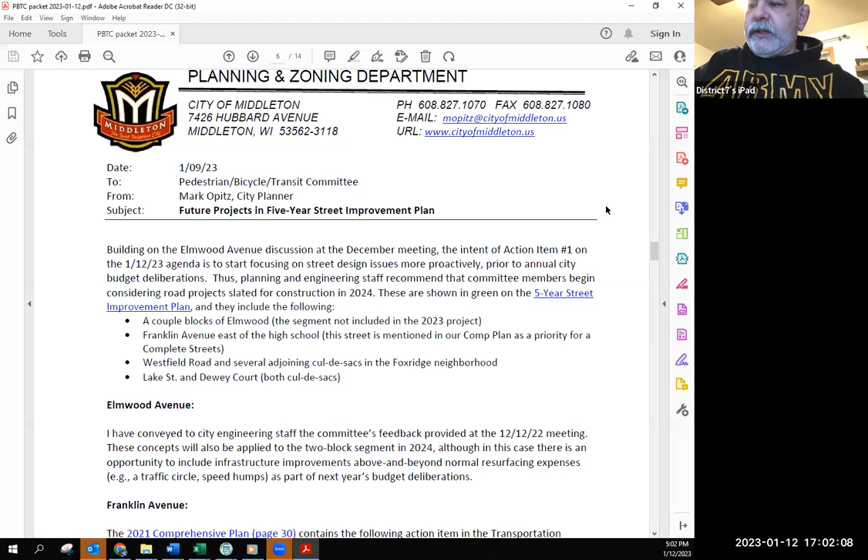Okay, our first agenda item is the 5-year street improvement plan projects anticipated for 2024. So what I'd like to do, Mark, is bring everybody up to speed. I want to make sure everybody's familiar with the fact that every year the city has a 5-year street improvement plan. Mark, would you put that on the screen for me, please?

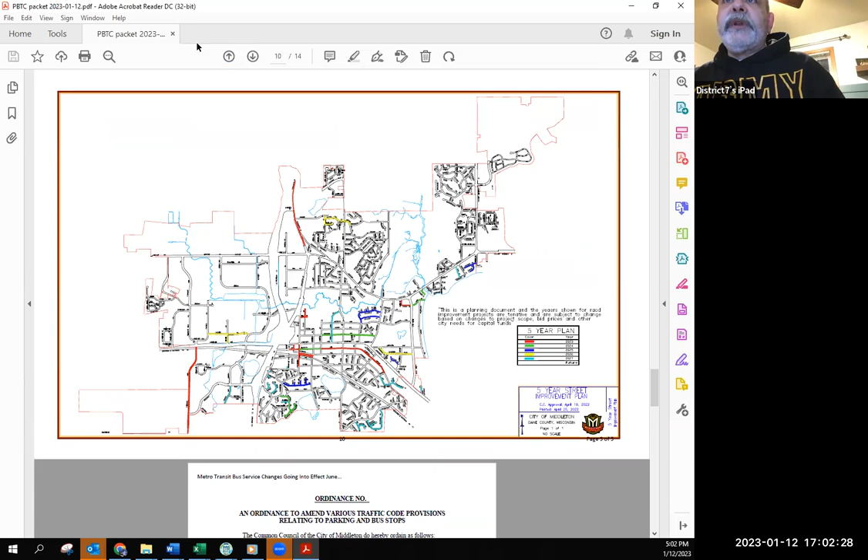While we do a 5-year plan and it goes through Public Works and then eventually makes it to Plan Commission, it makes its way to the council, it is a plan. So it's subject to change, and on occasion it does get switched around and changed or updated, but it's basically the plan going forward.

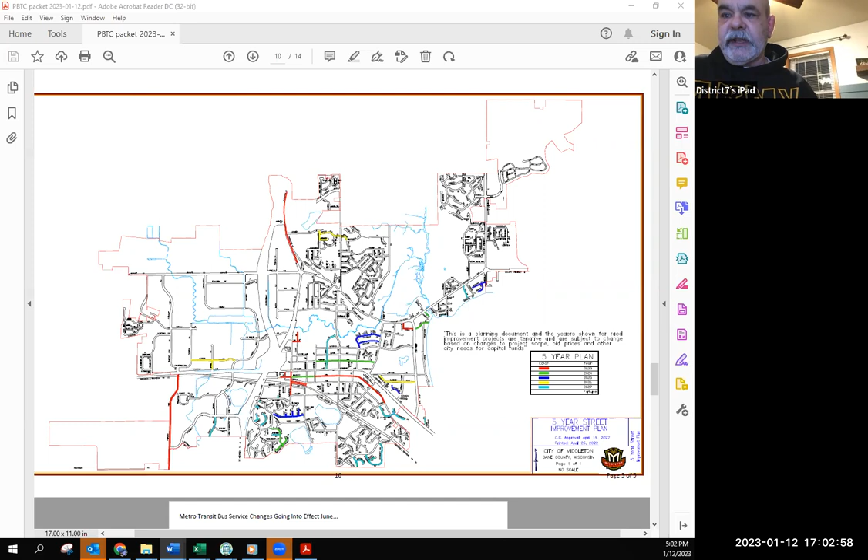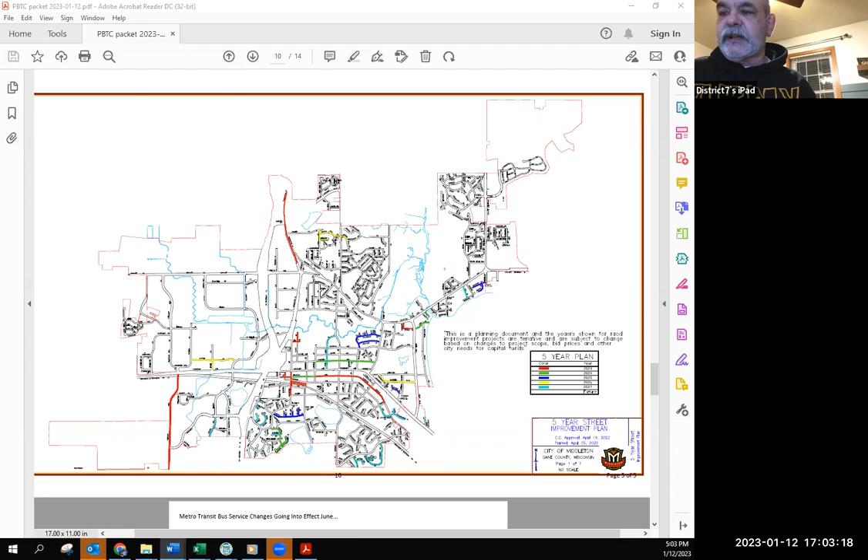As we talked about in our last meeting, this is the opportunity for the Bike and Ped Committee to take a look at the upcoming projects and have some input before it goes on to Public Works, which then recommends it to the Plan Commission and council. So to keep us on track, I just want to concentrate on the projects in Mark's memo, which are the projects for 2024, and we'll leave any other subject matter for another time.

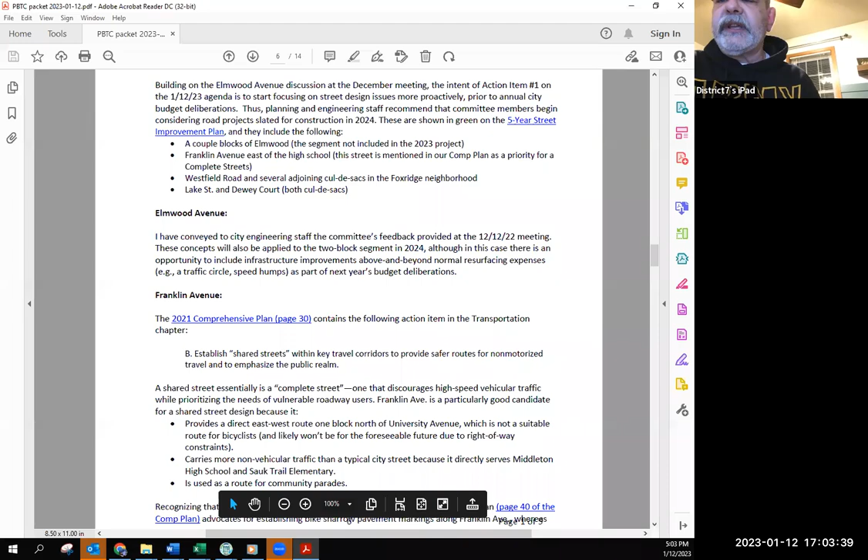Okay. So Mark, would you just give us an overview? I think the best way would be to go with each project one by one, and we can discuss it and see what we have for 2024, and see what suggestions or recommendations we'd like to pass on to the Public Works Committee.

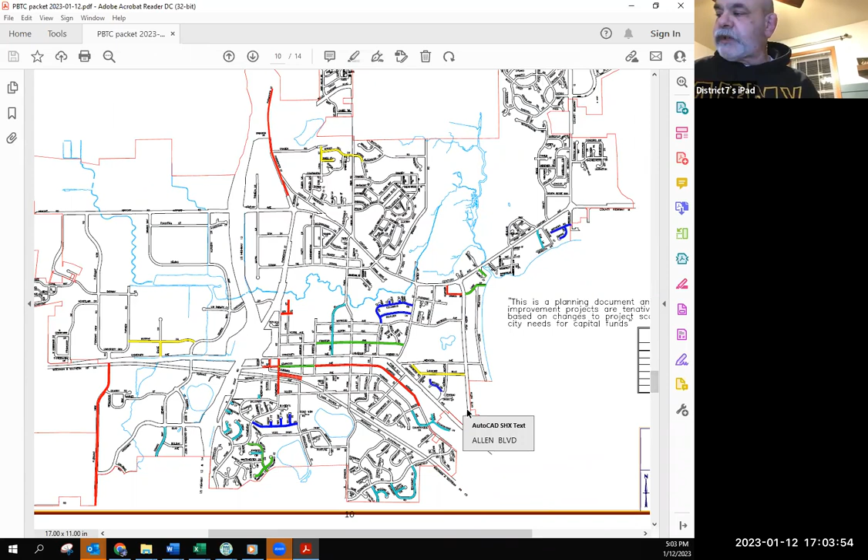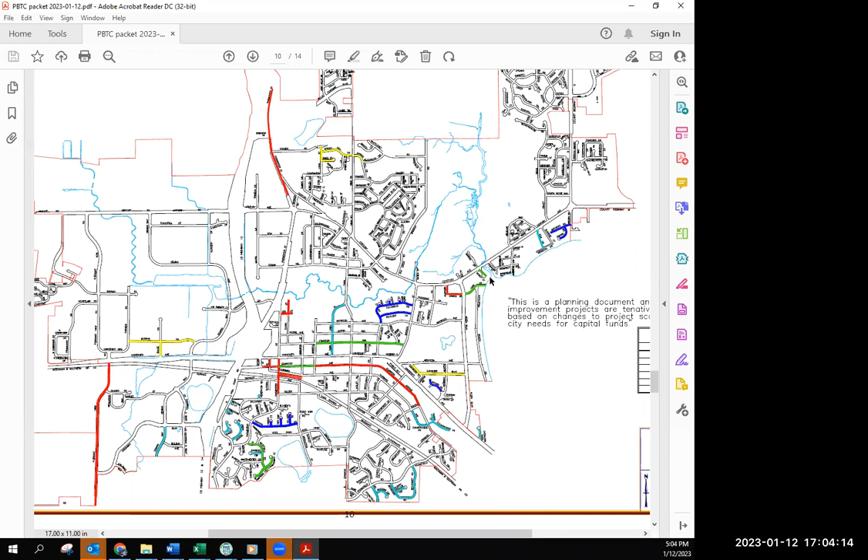Sure. So on the map here, the streets in green are Elmwood, Westfield, and Foxridge, along with a few adjoining cul-de-sacs. Franklin is located just north of University Avenue, and over by Harbor Athletic we have a couple cul-de-sacs as well. Those are the streets mentioned in the memo, and I'll take them in order.

So Elmwood, we talked about at the meeting in December, and that will be the last two blocks being planned for work in 2024. So I didn't think there was really anything to talk about there.

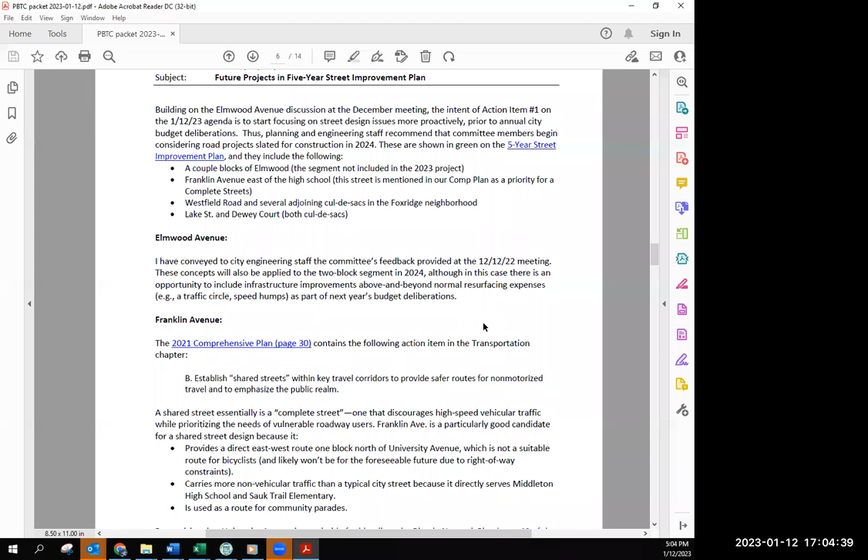I will briefly mention that there's been some discussion since that meeting about, given the fact that there are no bike lanes being recommended, possibly revisiting the east-west bike route through the city north of University Avenue, possibly shifting that to Hubbard. But we'll have that as a future agenda item.

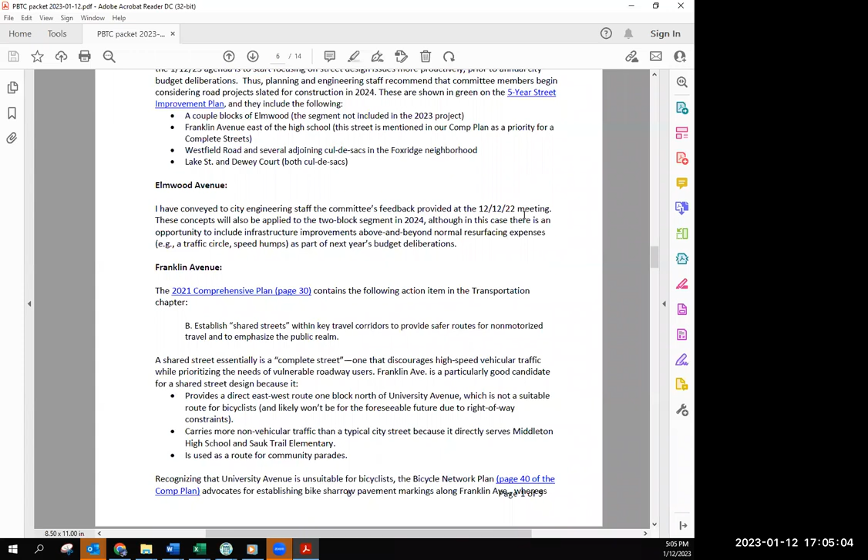Franklin Avenue got special mention in our comprehensive plan, so I wrote a little more about that in the memo. The comp plan referred to this as a possible candidate for a shared street, essentially a complete street, recognizing that we don't have a good east-west street north of University Avenue designated for heavier bicycle use and pedestrian traffic.

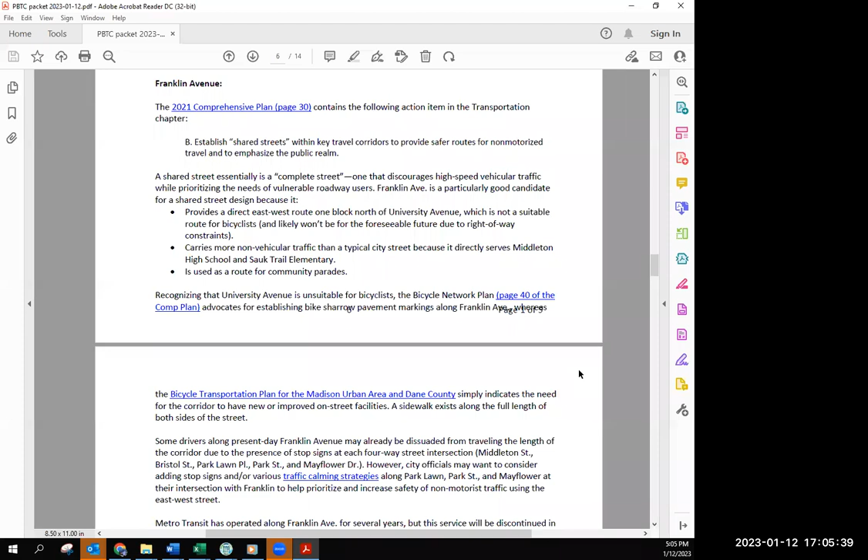Obviously all of our streets are to be complete streets moving forward, and that's why the comp plan identified this as a possible opportunity—as we look at redesign, reconstruction, or resurfacing—to install some amenities for pedestrian and bicycle safety. So that's the focus of the rest of this section.

I did note that we haven't really had a significant problem with crashes, especially involving pedestrians and bicyclists. Well, obviously one is too many—we don't ever want to see anyone get in a crash. Pedestrians and bicyclists usually lose out in those crashes.

We have the high school nearby on one side, Sauk Trail on the other. We now have this as the route of our Good Neighbor Festival Parade.

University Avenue is not suitable for bicycling at this parallel stretch of University, west of Branch Street. The bus service that exists there today is going to be discontinued in June. So those are the factors I mentioned in the memo.

I would recommend, Dan, that the committee discuss the traffic calming strategies, which I gave you a link to in the memo. This website came up on my other screen. Here we go, do you see it?

There are any number of websites I could have pointed to, but this seemed like a really good one because it showed pictures with the names of the traffic calming strategies.

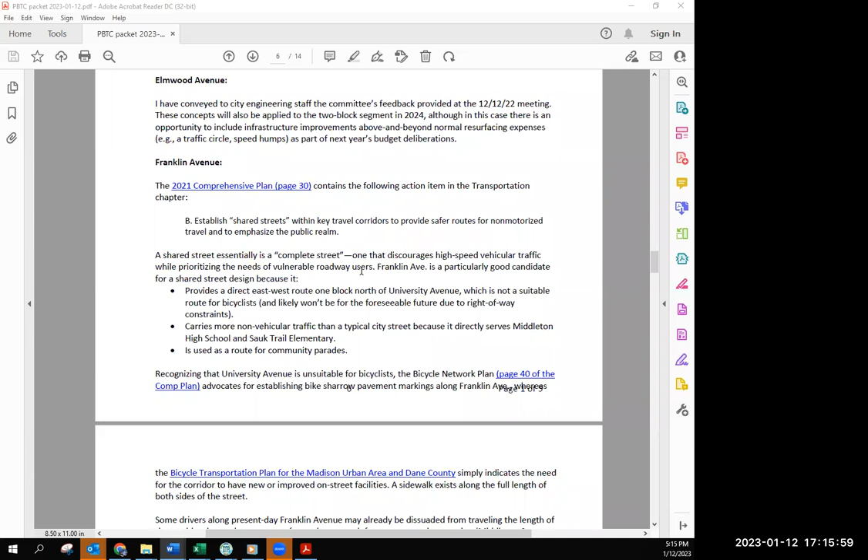And in your memo, you mentioned that Franklin has not been, if I'm not mistaken, a place with numerous complaints or accidents. No, or hardly any. That's correct. We have not, from what I saw in the data, the crash data from the last 10 years, there have been 3 crashes on Franklin reported in the state database. None of them involved pedestrians or bicyclists. And the crashes, I think 2 of them were at intersections.

I should clarify that these were crashes that were possible injury crashes or more. There could have been other crashes, probably property damage only, but the database wouldn't let me query all crashes—it was too large a data set and I didn't have a subscription. So it's possible there were other bumper to bumper, rear end property damage crashes without injuries. I want to clarify that.

The most significant crashes with potential injuries—there were only 3—seemed to be 1 possible injury and 1 minor injury suspected at Park Lawn and Park Street. The other was west of Wood Road. None of those accidents involved a bicyclist or pedestrian. That's correct—I checked all accidents involving pedestrians and bicyclists, and none had that flag in the database.

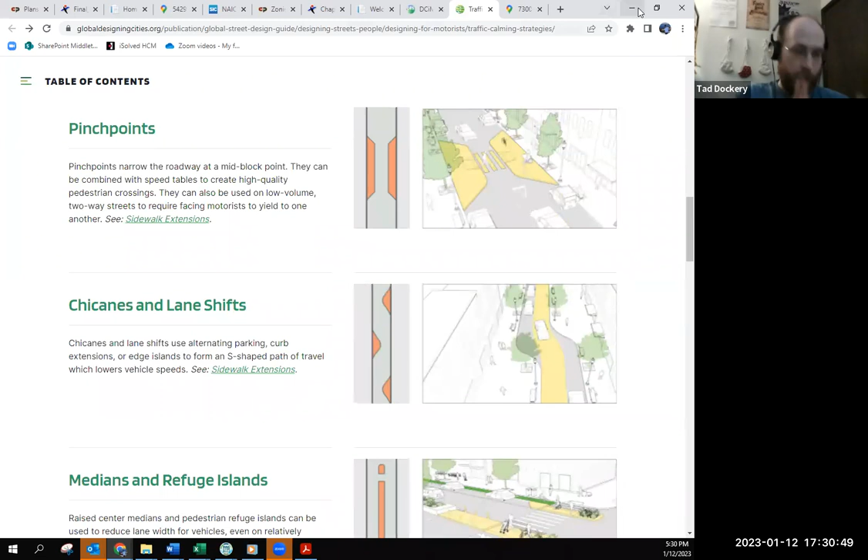Tad? So if we don't want to - I feel like we could narrow the street. I understand the curb and gutter aspect is very expensive, but I feel like we could nonetheless narrow the street if we used vertical elements like poles. We could put them in the street and we don't have to reset the curb and gutter. We can use paint in other places to emphasize the poles.

I don't know how much effort this would involve, but assuming it didn't utterly destroy the road, because that would be a bad thing, we could potentially put in some bioswales at various points without completely eliminating or having to redesign the gutters. I'm sort of just spitballing here.

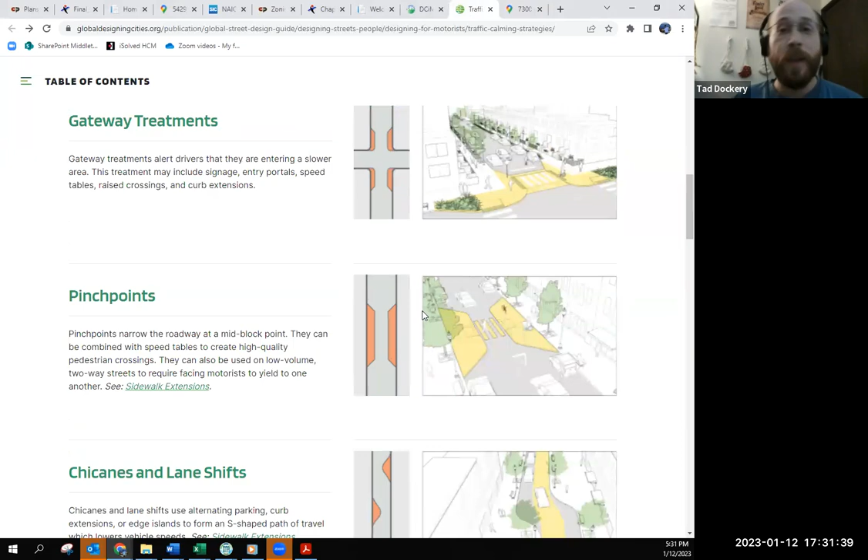Sure. I just suspect there's probably - and I wouldn't be surprised if other cities were doing this. I wouldn't be surprised. Davis, California would be one that I'm sure, if we Google Earth it, Davis would be kind of a mess, but I'm sure there are other cities that have done stuff like this, that have done mill and overlay and haven't narrowed the curbs, but have nonetheless narrowed the streets by various means.

We could do that, and we could do that to help define the on-street parking also. And by doing that to help define the on-street parking, we would put the cyclists in the middle of the road. That has some issues, but for me, I would actually be a bit more comfortable with that than I am with the usual stick 3 feet to the curb and have to swing into traffic mode. I would feel much more visible to motorists. So it's a thought.

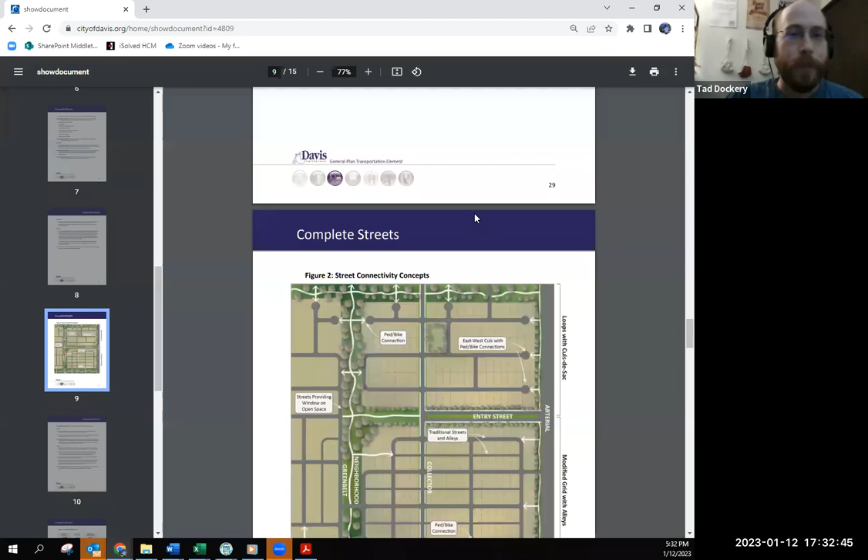I actually am looking at Davis, California here. I just was pulling up a couple things. So while you're talking, I'll just skim through.

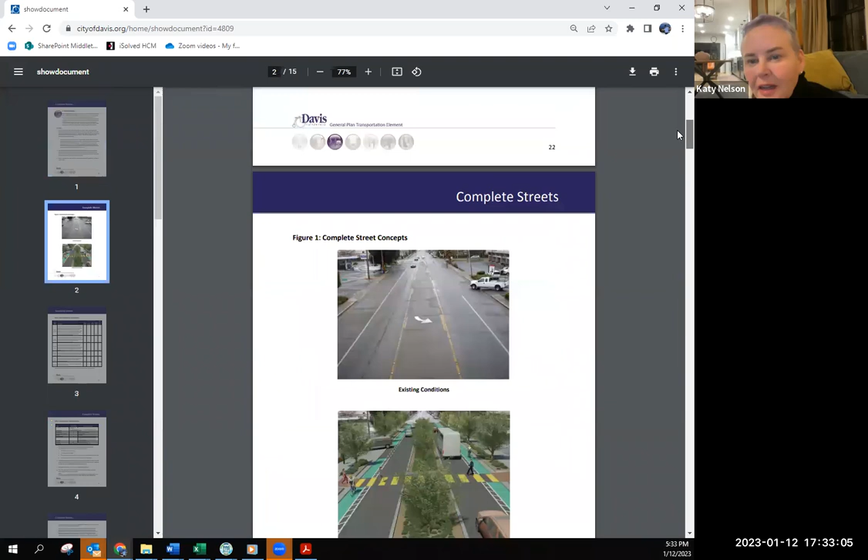Dan, I'm very sorry, I have to go to another meeting right now, CDA. Okay, thanks, Katy, I'm sorry. Is there any no-vote worries that I should come back for or anything? We'll probably be on that by the time you get back. So that's all right, okay. Thank you. Yep.

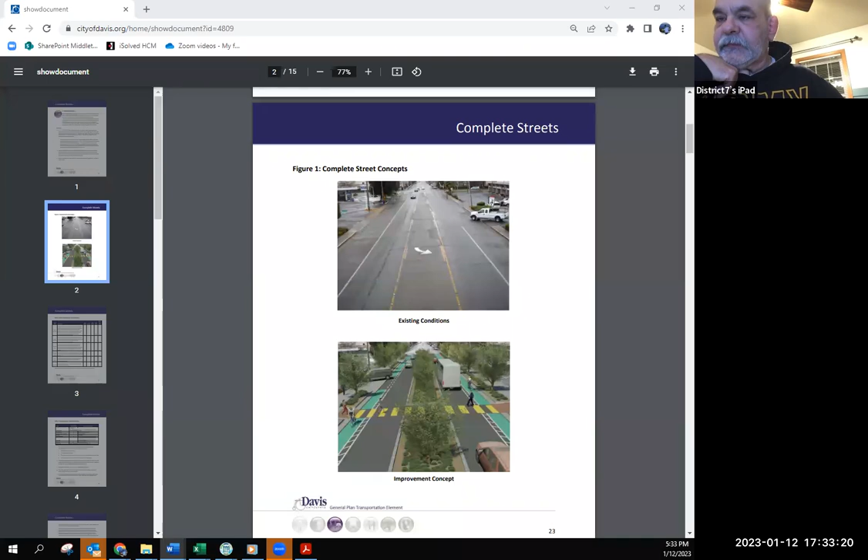One thing I would recommend in the way of signage is a stop sign on Park Street at Franklin would be good for a couple reasons. One, people coming from University Avenue, if they had to wait at the light while on Park Street to cross University, as soon as they get across University, they start to accelerate. There are about 3 houses along Park Street before they reach the corner of Park and Franklin. The other thing, going up Park Street, is they do not encounter any stop signs even when they reach Maywood.

So you have people who, rather than going down University if they want to get over to Allen Boulevard, may come up Park Street, take a right on Maywood, and then go down to Allen Boulevard that way. Visually depicting what Jim is saying, here's the Park-University intersection.

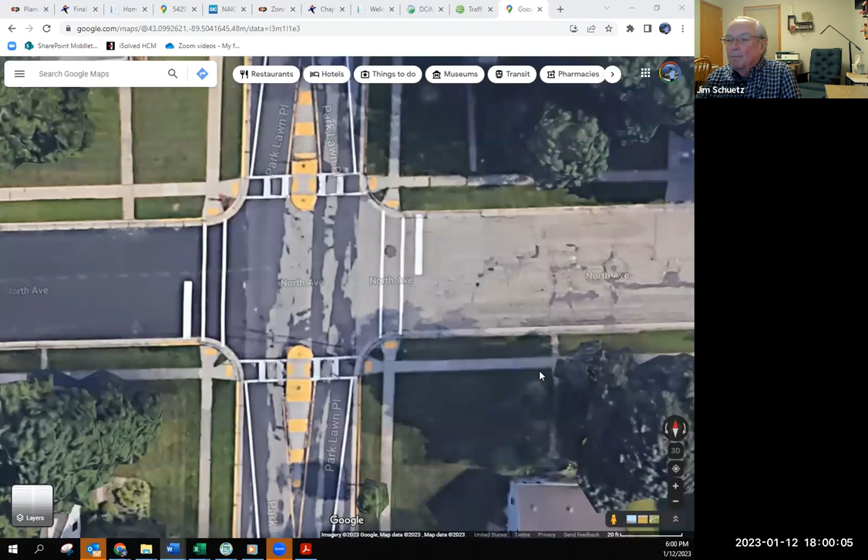Are the ladder pattern crosswalks then at all the intersections along Franklin? I don't think so, it's just that that intersection seems to be so much busier because of Park Street than the other intersections. Actually, we're looking now, well, that was Park and North, Park Lawn and North.

Mark, can I ask you a quick question about that? Does it make sense to go with the ladder pattern all over, since we're trying to make people more aware of pedestrians? Does it pay to be consistent with that? Yeah, all of them from now on?

Yeah, that's why I'm asking for clarification. Go ahead, Dan. I'm sorry, Mark, I was just going to reiterate that's why Mark was asking that. The question is whether or not the committee felt that we just needed that at Park and Franklin, or if we were looking at trying to make that a new standard, in which case we'd want to do it at all the intersections.

And Shawn will say then what governs why they're placed here and not at every intersection in the city. I'm just telling you what he'll say. Well, that's why we have different committees, and why different committees recommend to the council, and then the council decides if there is a conflict.

I mean, isn't that kind of what we're going to try to do, is gradually have all of them be consistent? So, to answer Shawn's question, yes. The answer to why they're not already all over is they will be. It's an immaterial question because it's part of the plan.

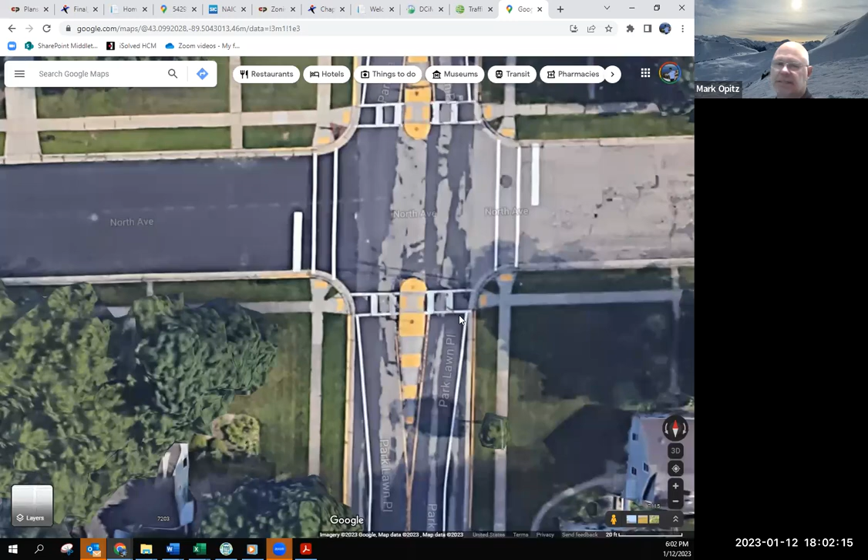Yeah, and I'm just wondering if there's something to be done with the paint, if you can put some kind of additive in it. But I interrupted Carrie, so let's let her finish.

Oh no, it's okay. I was just wondering, is it okay that this is all in one motion, in terms of it going to Public Works? I don't want them to necessarily, like, because they're separate issues, lump them all together and say, nope, we can't do any of it. Or do you think it will be like, here's some options to consider for each thing?

So maybe it doesn't matter if it's in one motion. I don't think that these are our recommendations... I don't think that it'll matter that it's all in one motion, Carrie. You're on Public Works, so you know the spirit of what Bike and Ped wanted to do, and frankly at Public Works they'll pick and choose and say, well, we think we can do this, but we don't think we can do that. That's kind of how it'll go.

Okay, that makes sense. I'm kind of thinking that four-way stop at Franklin and Park, because it's closer to the stoplight, I'm not sure if that will be doable or not. I'm sure there'll be discussion for that. No, I'm not going to complicate it, I think it's probably okay this way.

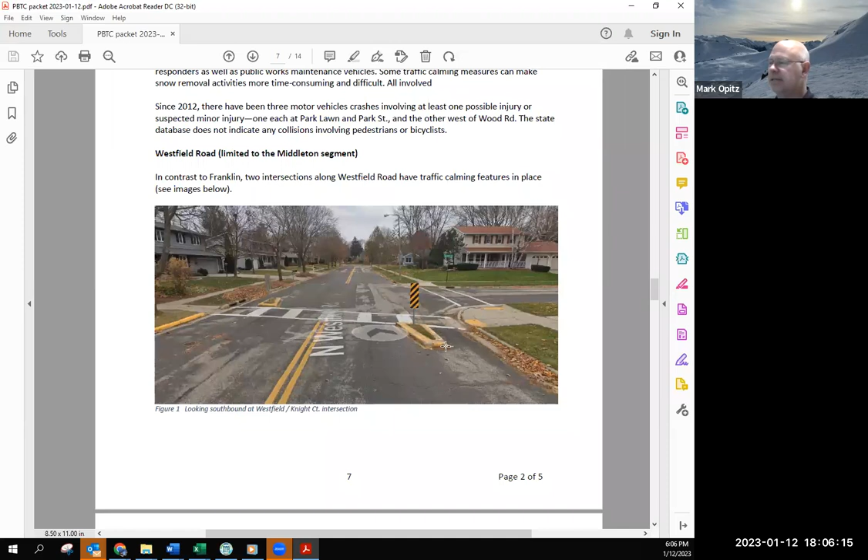It does sound like there have been some complaints over the years from people about this. I'm sure it's not very easy for snow removal, but those are the pros and cons here. They do have a little ladder style crosswalk. And then here's the intersection with Hampstead. It's a court on one side and a road on the other, I think.

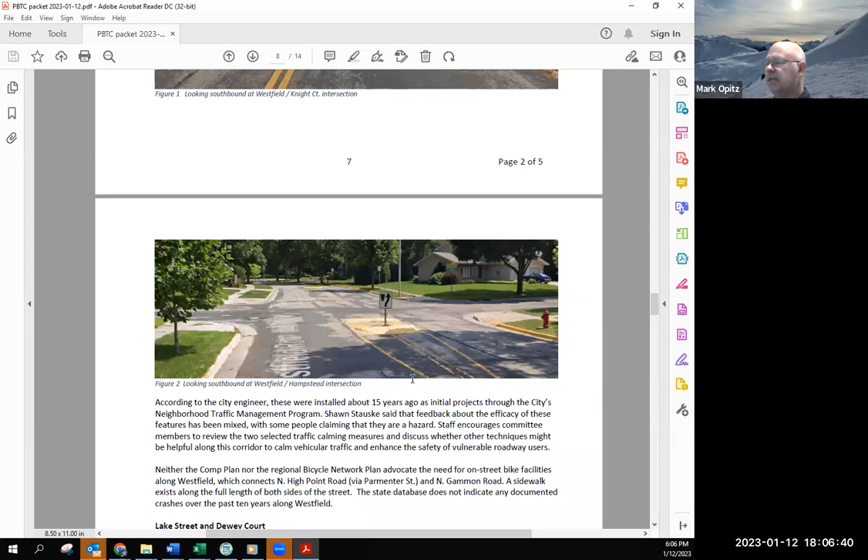Actually, maybe they're both cul-de-sacs. But anyway, so there's a mid-block pedestrian refuge here. As I said, these are about 15 years ago. Feedback has been mixed, according to Shawn.

Are there any other techniques that you would consider helpful to calm vehicle traffic and enhance the safety of pedestrians and bicyclists? Neither the comp plan nor the bicycle network plan for the region identified a specific need or called out the need for bicycle facilities along Westfield. Doesn't mean we can't consider any, but I did consult those plans, and the state database does not indicate any documented crashes over the past 10 years along Westfield. And I should have said injury crashes.

So that's what I have for Westfield, and I can take us there with the browser.

I guess my thought on Westfield, and I'd like others to weigh in, but my thought is: if we've had these traffic calming features in for 15 years, and you understand that anything you do is going to be somewhat a mixed bag as far as people's opinions, I do not see any reason in taking them out, and I would redo the street exactly the way it is.

I agree. It's consistent. Yeah, I agree, Dan. Sorry, go ahead, you weren't finished. No, go ahead, Carrie, did you have something else to say? Oh, no, I was just going to agree with this.

And this was actually brought to Public Works a couple of years ago, I think, and we kind of came to the same conclusion - that there's always going to be, like you said, some complaints. What we had heard was some people didn't like it, some people did, because it was near the park. I think that's why that was placed. So I would agree, just keep it both on both areas, in both roads.

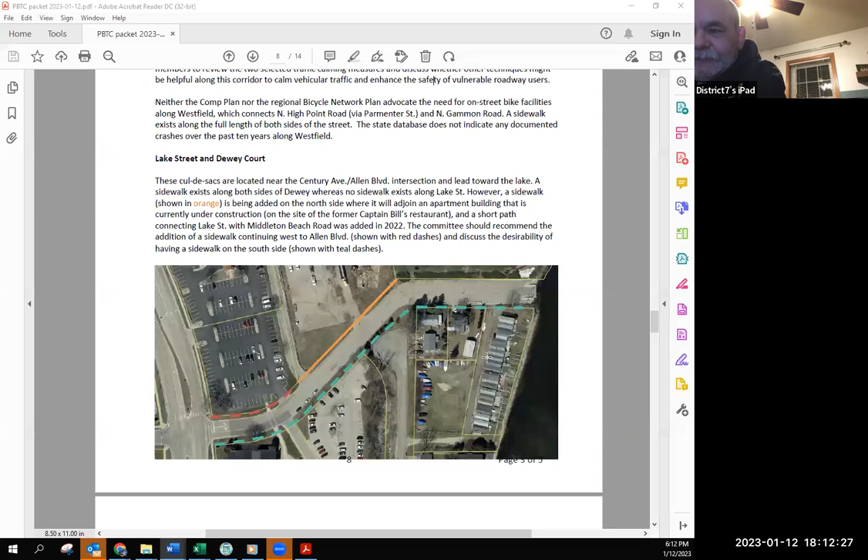Okay, next we look at Lake Street and Dewey Court, Mark. Dewey or Doey? Dewey. Yeah, so I think I only did the photo - I didn't do one of Dewey Court. We can cruise over there quickly too.

Well, since I have Lake Street up in the meantime - so what you see in orange is where the Captain Bill's site used to be, and that's going to become either a 4 or 5 story, I think it's a 4-story apartment building. Can't remember how tall it's going to be, but anyway, it's going to be an apartment building.

And as part of that, the sidewalk will be going in. It would make sense, of course, to have a sidewalk continue over to Allen Boulevard - that's shown in red. One of the questions is, do we also want to, as part of that street project, have a sidewalk added on the south side of the road?

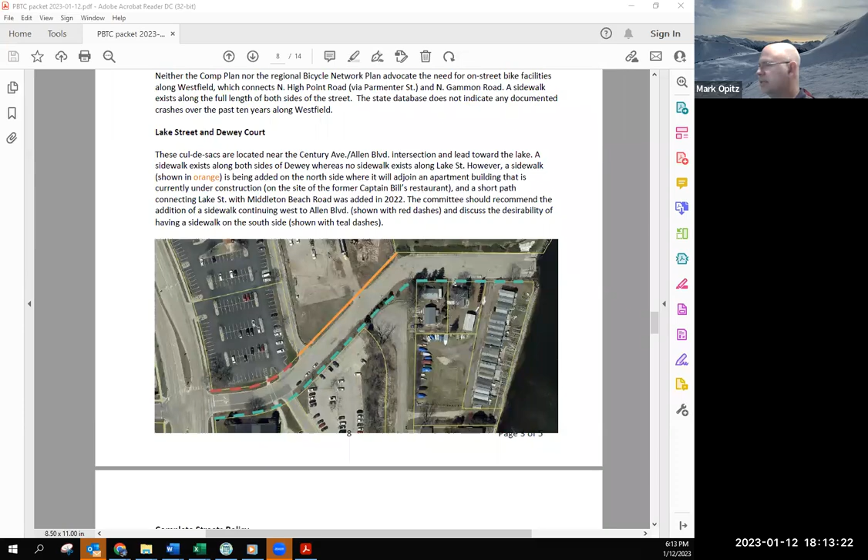There would be some impacts to vegetation. I don't know if that street's being reconstructed or not, or if it's just a resurface. Dan, maybe you - I'm sorry, off the top of my head I don't remember. Kerrie, do you remember? I don't recall either. It looks like the curbs, this is from July of 2019.

They look like they're in good shape, the gutter pans are in good shape. Again, unless there's utilities that have to be rebuilt, which is pretty rare to have to do, so yeah, I don't think so.

Here's an example of just somebody happened to be walking in the street, so there's obviously no sidewalk accommodations right now. That's not acceptable. I think it's pretty important to have sidewalk on both sides of the street because there's the shopping centers and all the stores on the other side. Harbor Athletic Club is there, there's a lot of people walking around just getting into Harbor. So I think it'd be really important to have them on the sidewalk and not in the street.

Also, there is discussion in planning to do something with the lake access there, which - I don't remember exactly what the plan is, but Parks Committee is talking about doing a project down there, which would increase the number of people using that area for recreational use. So we could put a bike symbol in the street, a Sharrow symbol.

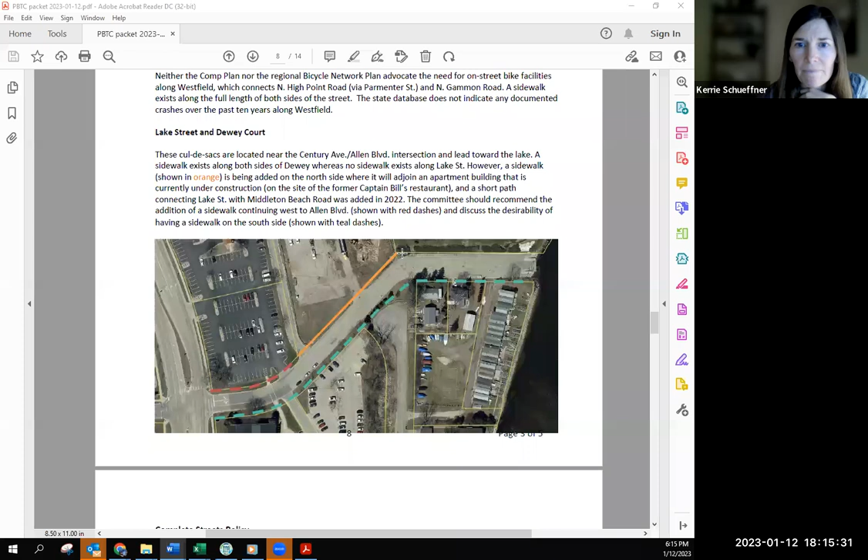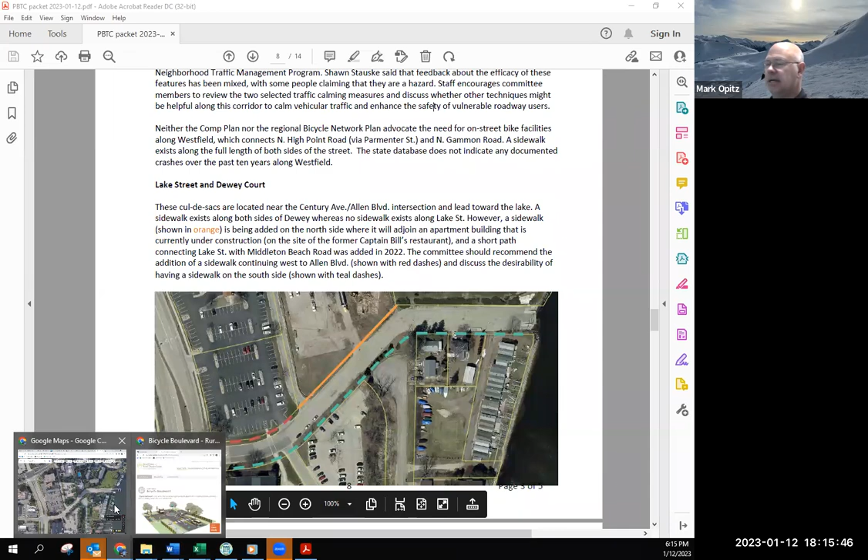Okay, so I guess the orange is already going to have sidewalk coming in with the apartment complex. Yeah, I don't know about extending it. Well, if you go all the way to the lake there, I think there's a property issue there.

Yeah, that's their buffer. So I don't know how you feel about sidewalk on both sides. Obviously, there's an impact here. One option would be to narrow the street, which of course requires replacing the curb so the sidewalk isn't affecting the vegetation as much. But I think it's important to have it on one side of the street to go to the lake. No question about that.

So, Mark, is this going to be consistent with the plan that sidewalks will now be 5 feet wide? Yeah, the sidewalks, when they're built, it's my understanding they're built to be 5 feet wide. That's my understanding, unless there's some sort of constraint.

So I guess, Kerrie, what I was asking is, are you intending to have it be on both sides? That's fine with me, I'm just pointing out there's going to be some impact. Yeah, I like the idea of having it on both sides, but I also like narrowing this. But is that a boat launch where maybe they need it wider? Yeah, it is a boat launch. So narrowing that street is going to...

It's the only Middleton boat launch that we have that's actually Middleton owned. Marshall Park belongs to Madison, and Mendota Park is Dane County. So I think it's somewhat important that we keep that as a boat launch.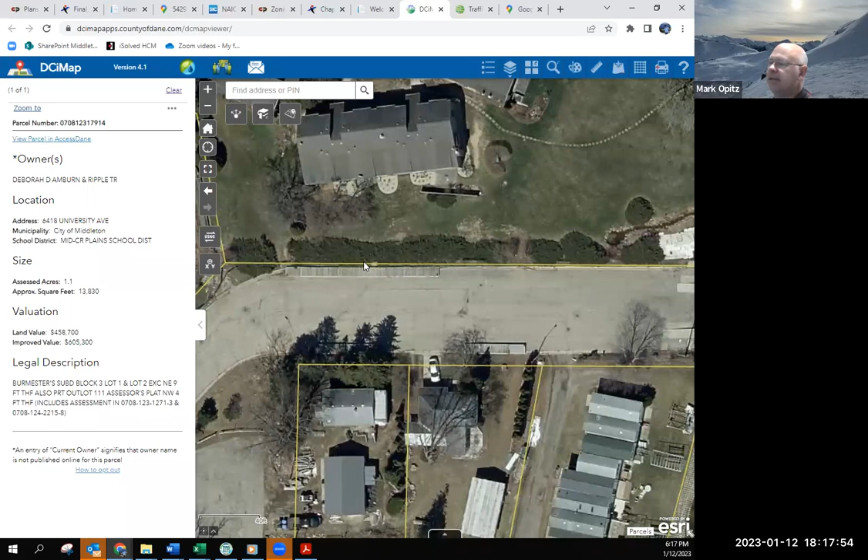Yeah, I mean, I don't know what the property ownership is here, but I know that's a constraint, and I know that the residents in the condos are very vocal. So it's just... what's this? Yeah, it looks like the property line might be right there. I mean, there's distortion with this aerial photography, but anyway, you can make that recommendation and see where it goes.

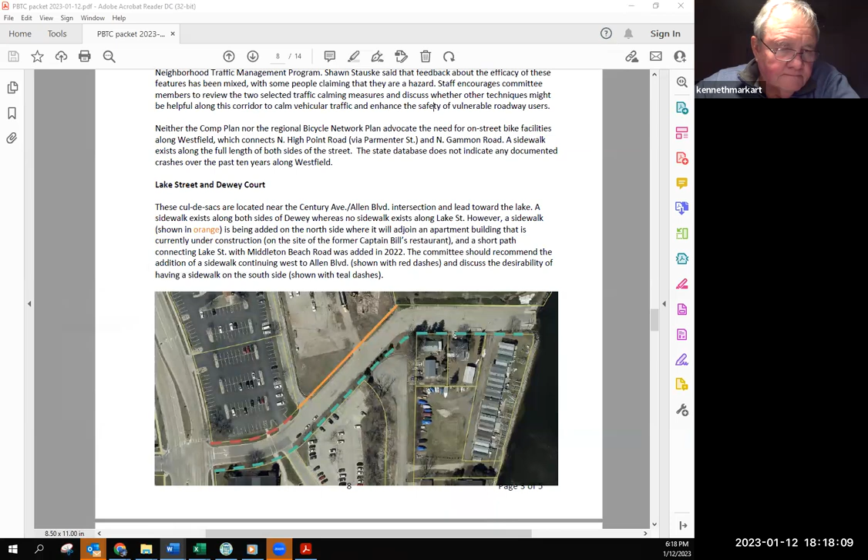If that's the case, that is consistent with our complete streets policy. Okay, I'll keep it. I see nothing wrong with making the recommendation, if that's the way the committee feels. Is there a second?

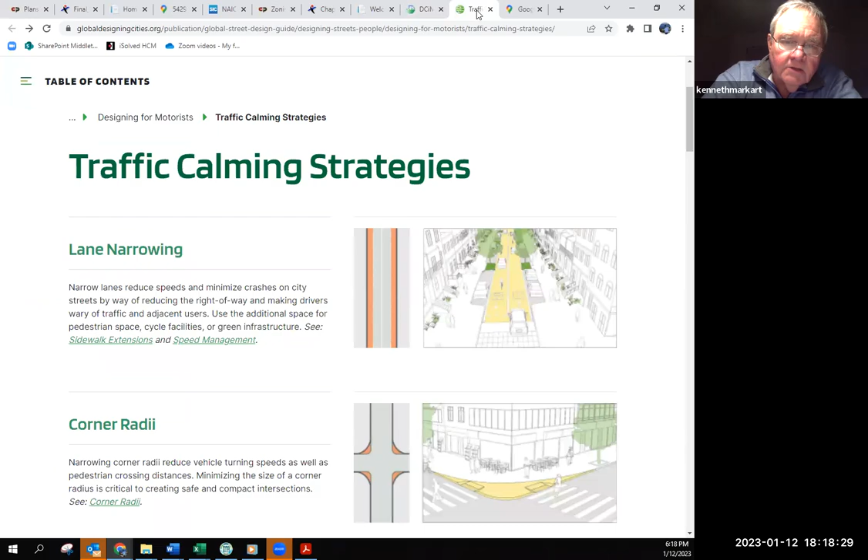May I make a suggestion here? Sure, please do. At the intersection of Lake Street and Allen Boulevard, can we enhance that crosswalk? I mean, that's really a rat race down there on Allen Boulevard. Can we have, like, the flashing lights?

Or is there something there? No? There's no beacon there, if that's what you're asking. Is that what you were looking for, Ken, one of those pedestrian beacons? Yeah, I mean, there's high-speed traffic going through there. I know I've used that street and I see pedestrians, I slow down, but cars pass me. Sure, that intersection's a mess right there.

Every part of that intersection's a mess. And the one up the road at Century is a little worse. Yeah, but there's going to be more traffic because of that apartment building. I mean, so, RFB here on the north side.

In fact, it looks like they don't even have a crosswalk on the south side. No, they're directing everybody to the north side. But as part of the Lake Street project, we certainly could recommend that they put in an RFB from Lake Street across Allen Boulevard. Is that your suggestion, Ken? Yes, it is.

Would you like to add that to the motion then? I would. Carrie, would you accept that? I like the idea, I just don't know if that's going to be an effective place. I'm a little concerned about pedestrians, just because I don't know. I want something there, but I just don't know if that will help, just because of the divided highway. It's such a long intersection that I just don't know if that's a feasible place for that.

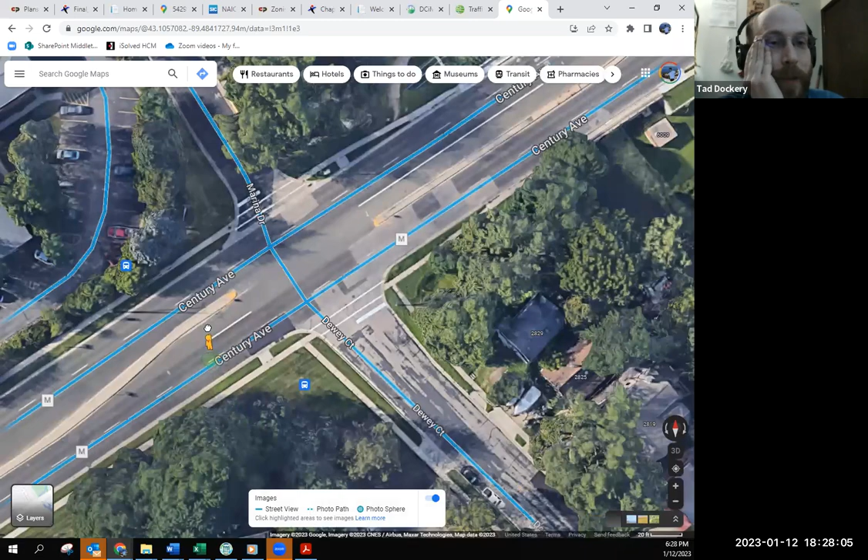But you can kind of tell from that map, pedestrians are not meant to cross there at all. The crossings are intended to go straight across, and I've used that median as a pedestrian refuge, and it's not fun. But the angles don't go there—that is car land, and you should not be there. That's how it was designed, very different from further east where there's an actual intersection.

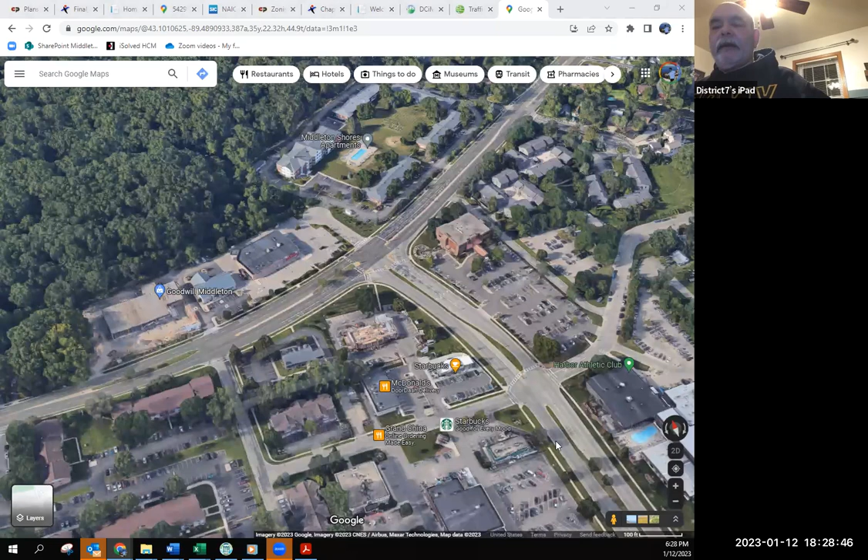I think that's part of the issue. And I agree with you, Tad—I'm not saying we'd get an RFB there because of that exact issue, that there's no refuge. But at some point we'll redo Century, and I think it's a good idea to get on paper that at some point we recommend something there.

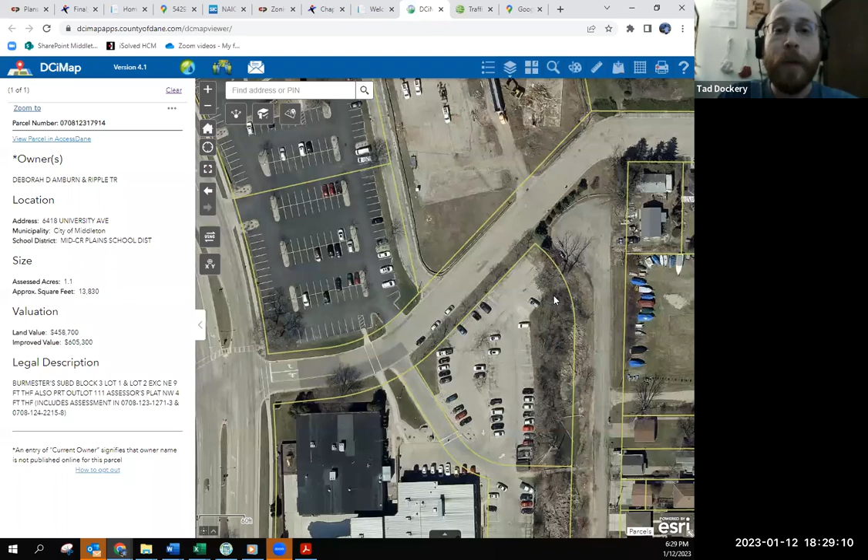I guess I'm just checking—do we need to recommend crosswalks there first before we add the RFB? Are they part and parcel? I would say yes, they would be in conjunction with it. We would never put a crosswalk there without one.

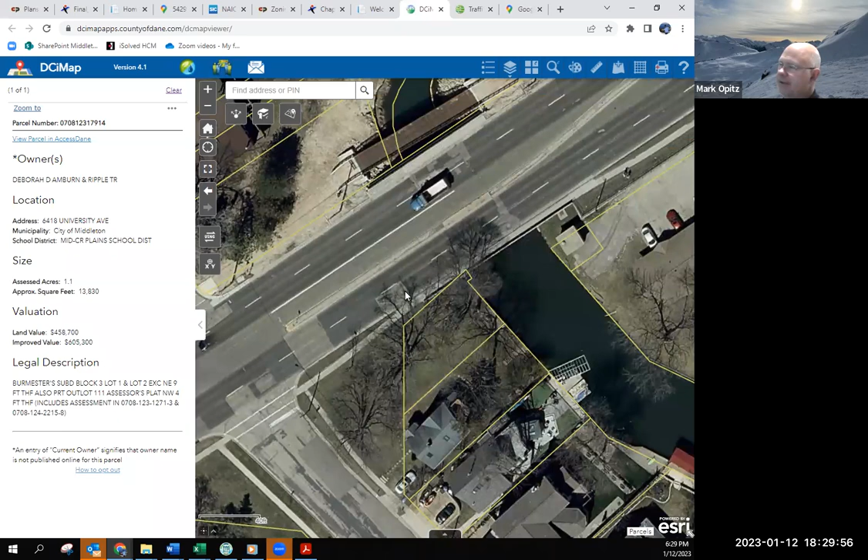I'll say I've thought about this intersection in the past. I was trying to look at a way to get a path underneath this bridge when it gets rebuilt, coming in along the side of this property owner here. I don't want to go into too much detail—it's not a very viable option, certainly not a short-term project, but there's some potential redevelopment that's going to occur at Middleton Shores in the future.

I don't mean to call it redevelopment and get ahead of their plans, but they are asking us about options for their property, let's just put it that way. So there might be an opportunity to get a little more right of way and do some widening here to get the pedestrian refuge. So like Dan said, this is a great time to say this is an important need.

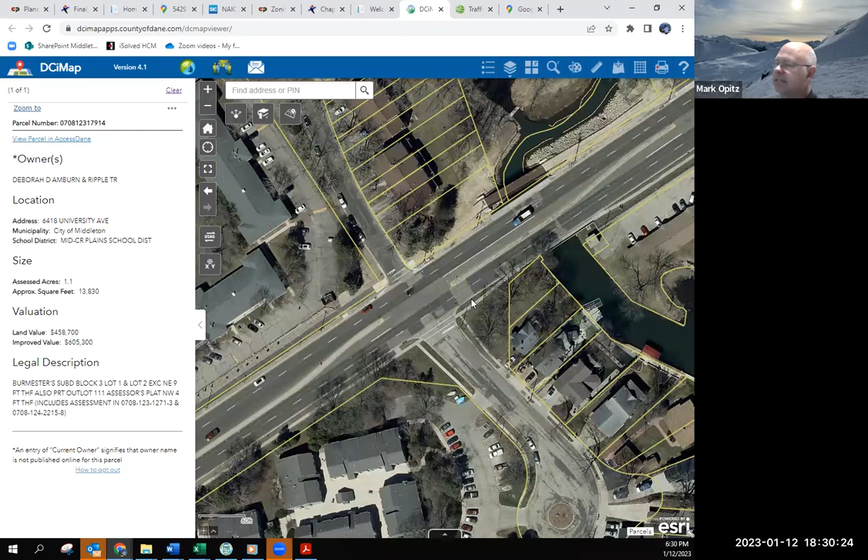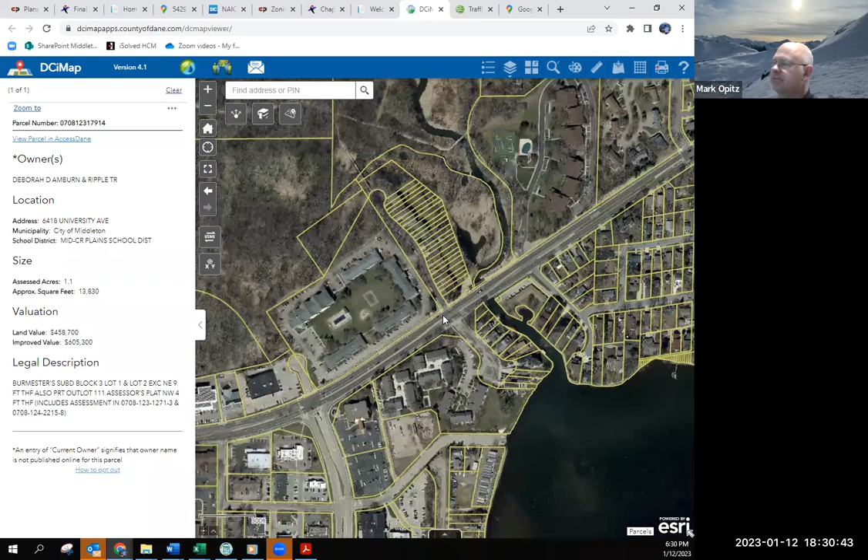The comprehensive plan does identify Century as a problem in terms of being a barrier, that there's such a big gap between crosswalks. You have the one at Allen Boulevard, and then the next one's up at the top of the hill, and that distance is terribly long to not have a crosswalk. So I think this is a great time.

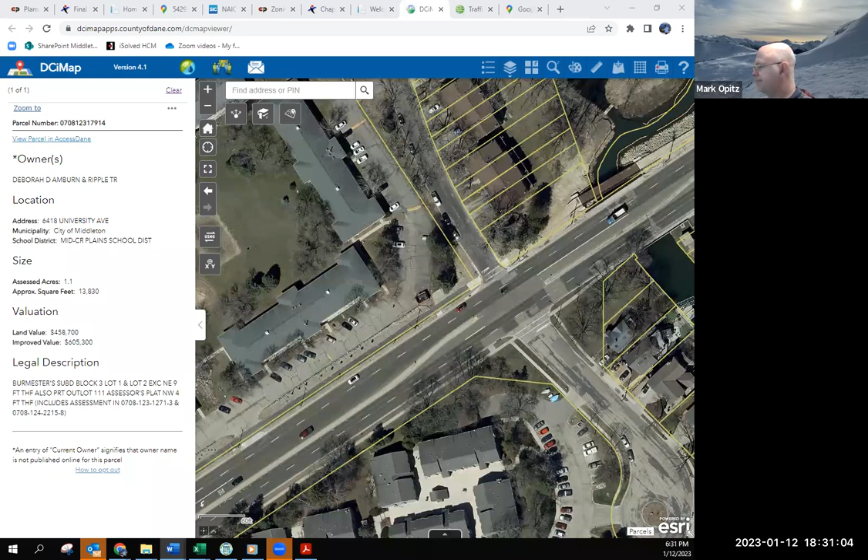I'll put that in the notes too—I'll mention the comp plan identifies this as a critical need. Establishing a crosswalk is a critical need. Okay, does somebody want to make a motion to that effect?

If not, I will. I can try if you like, Dan. Go ahead. This is at Dewey. No, wait, this is at Dewey and Century.

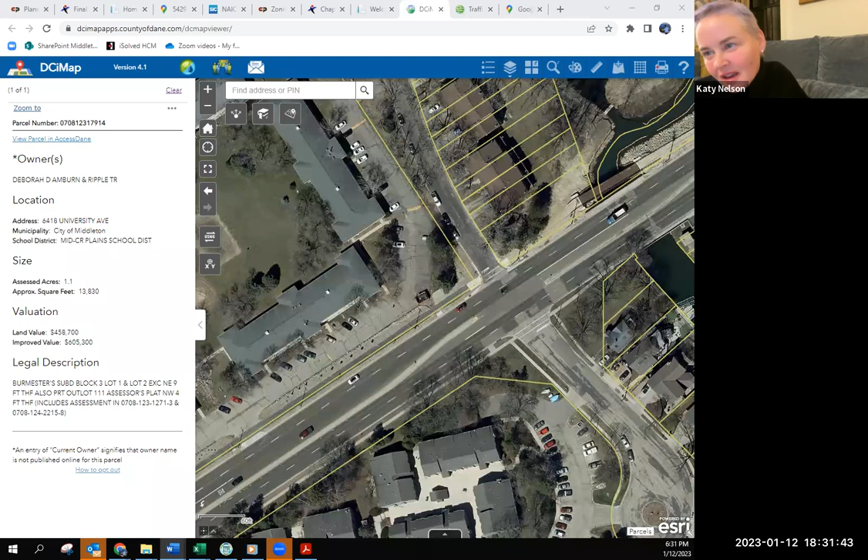The committee recommends a crosswalk, RRFB, and pedestrian refuge across. Was there anything else we were talking about? Yeah, we want the sidewalk to continue around the whole cul-de-sac, since there's a little gap here.

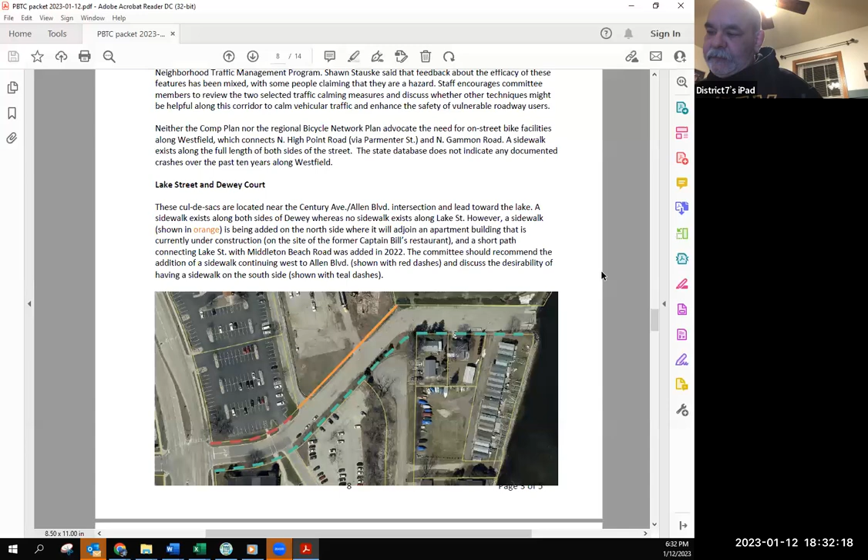Is there a second to Katy's motion? I'll second. Dale seconds, thank you. We have a motion and a second. Any more discussion? All those in favor signify by saying aye. Aye. Opposed? Motion carries. We are on to our next agenda item, which is Metro Transit bus service

changes going into effect in June 2023. Mark, I added to the packet yesterday, hopefully you noticed it. This is a formality, putting in motion the new bus stops via an ordinance amendment. There are 8 of them, and then deleting, unfortunately, a huge long list of bus stops currently on the books. This would be a recommendation to the License and Ordinance Committee and Council, consistent with the agreement and change in bus service we have with Madison Metro. So this is kind of a housekeeping ordinance, if you will, that implements the bus service that goes into effect in June. Thank you.

Can I get a motion to recommend this to L&O and council? I will move to recommend this to L&O and council. We have a motion by Ted. Do we have a second? This is Carrie, I'll second. Any more discussion? All those in favor signify by saying aye. Aye. Opposed? That motion carries.

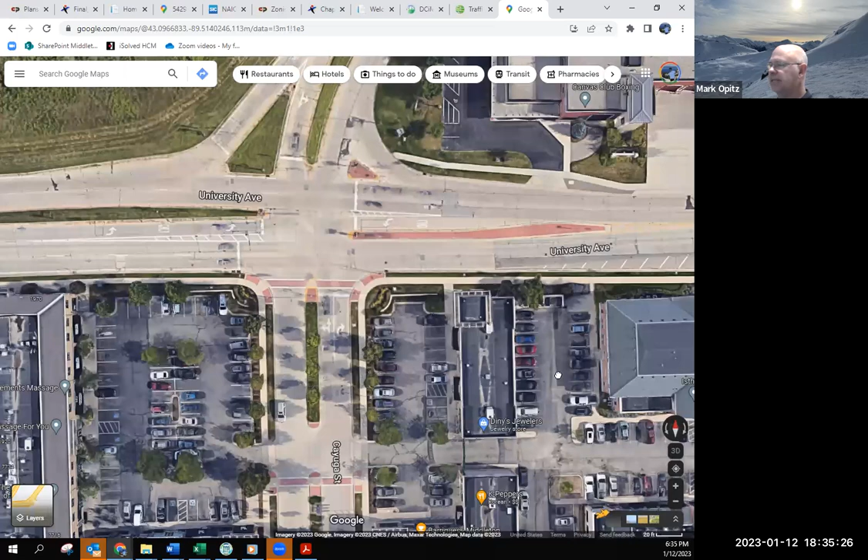So when they're in the curb lane heading east and stopped here, they need time to merge left and get into the left turn lane to turn onto Parmenter Street. Metro Transit wants to put the stop on this side of Cayuga, or possibly this side, but not that far east. We're having a big debate with them about it, I won't go into all the details. The point is the bus stop will be at one of these locations, but not exactly where I previously said. That's what I want to convey to you.

There's going to be art on the side of these shelters, so Abby and I would like to put one here, replacing this sign, though that is private property. We want the shelter to be a very attractive, artistic shelter for the downtown. We're working on that. I don't have a resolution for you right now, I just want to bring it to your attention. Okay, thank you.

The last item on our agenda, Mark, is an update on the North Mendota Trail project schedule, everyone's favorite project, going as smoothly as any project we've ever had in the city. Oh my God. So the contractor, Badgerland, did not get as much work done last fall as we had expected. They only started the work over by, well, I might as well go to the map. Let's see here.

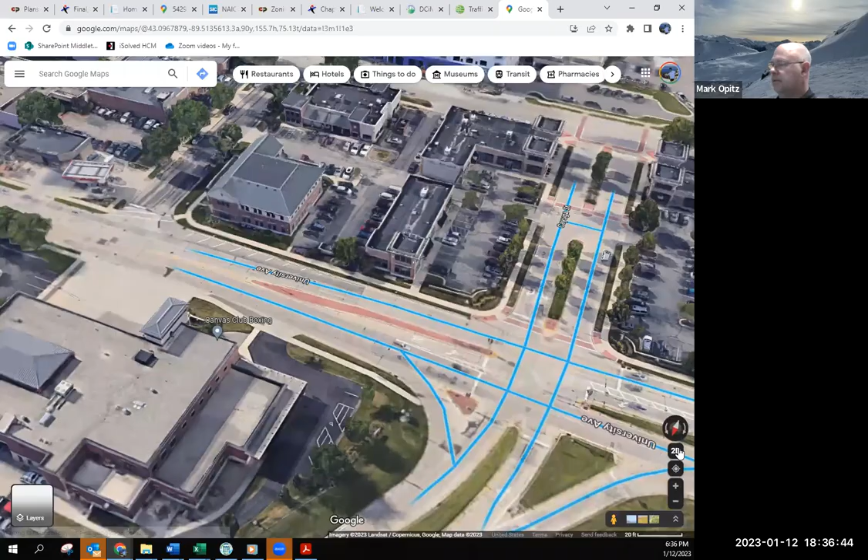They only did the part in front of the Arbor Lakes Apartments. This sidewalk was removed and unfortunately not replaced, as they've probably updated you previously, so they'll start again this coming spring. They also still have to put in a retaining wall in front of Dollar General and Valley Ridge, and I think there's also a part in front of the condos.

We've said to them emphatically that we do not want to see them rip out the sidewalk that's here today. We don't want to see them remove that and have it sit open, unpaved for months. That's just not acceptable. So I asked them for a schedule to illustrate what their timing is for completing the project.

Sidewalk removal is still shown terribly early, April. Well, I shouldn't say terribly early, nothing is early with this project, but they're showing it in early April. They wouldn't do paving until, let's see, surface curb and gutter, install concrete sidewalk in May, curb and gutter, asphalt paving in May. So that's basically a 6-week window, which I still consider entirely unacceptable.